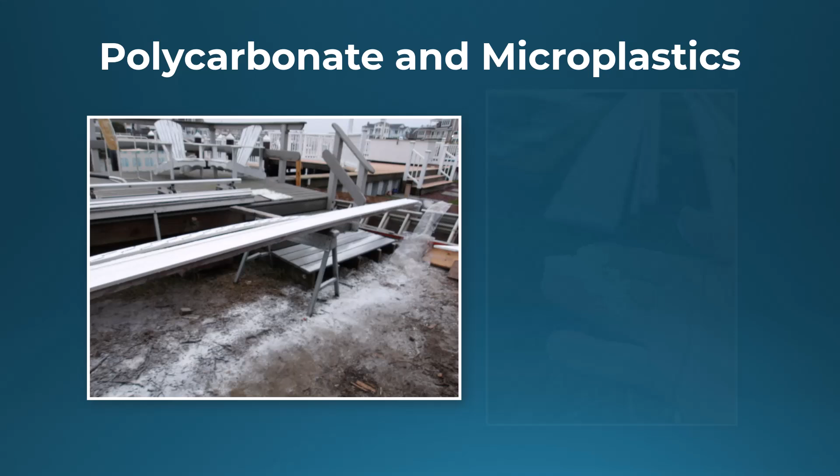So what are typical contaminants produced at the work site? We have polycarbonate materials and microplastics from items such as vinyl siding, vinyl railing, tracks, AZEK, and PVC pipes, just to name a few. Silica dust from cutting and grinding pavers and cement products. And of course, we have fiberglass.

These contaminants make their way into the air, soil, stormwater, watershed, and ultimately into our bodies either from being inhaled, ingested, or rubbed onto our skin. We will start by reviewing the health hazards of the majority of contaminants produced on a typical construction site.

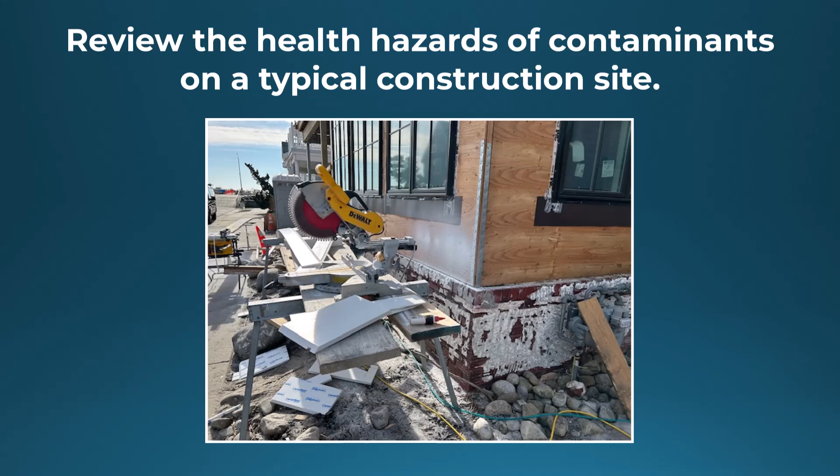The health effects of microplastics. Microplastics have been detected in numerous organ systems, including the cardiovascular, digestive, endocrine, respiratory, and urinary systems. They've been found in body fluids like the blood, placenta, breast milk, and also in organs such as brain, heart, lungs, kidney, and liver. Microplastics can become airborne and ingested by any mammal that breathes, such as humans, cats, dogs, bunnies, and other animals found in our environment.

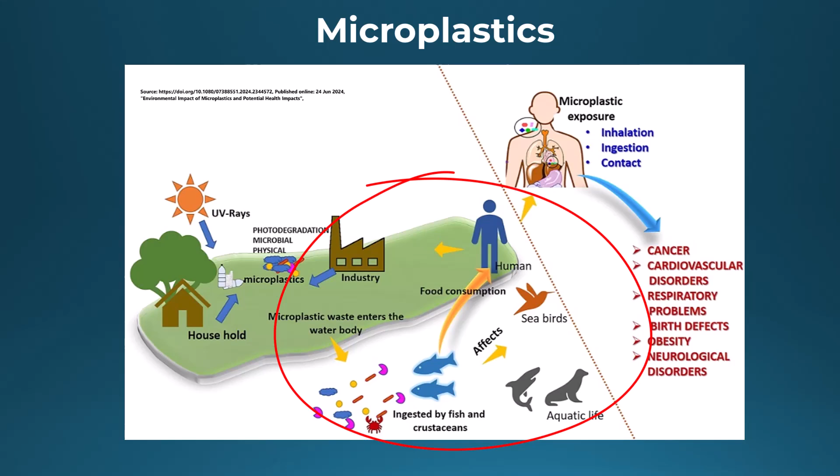Once in our waterways, not only do they pose pollution issues that can be visible, they can travel thousands of miles and contaminate our marine life, which ultimately end up in our food supply chain.

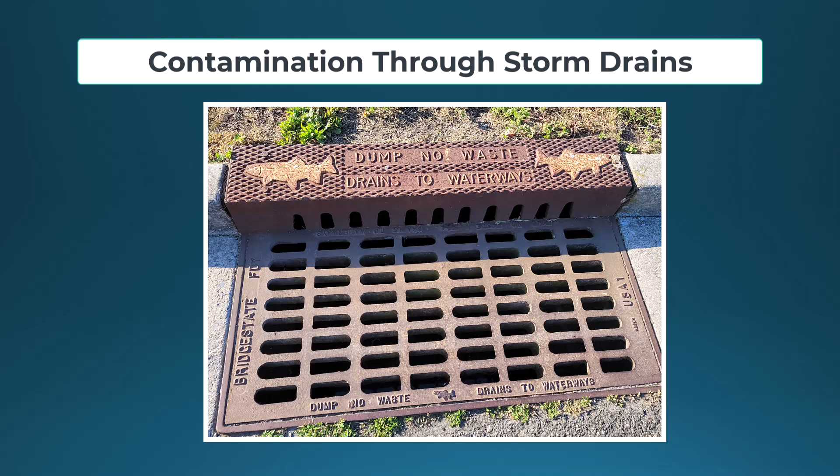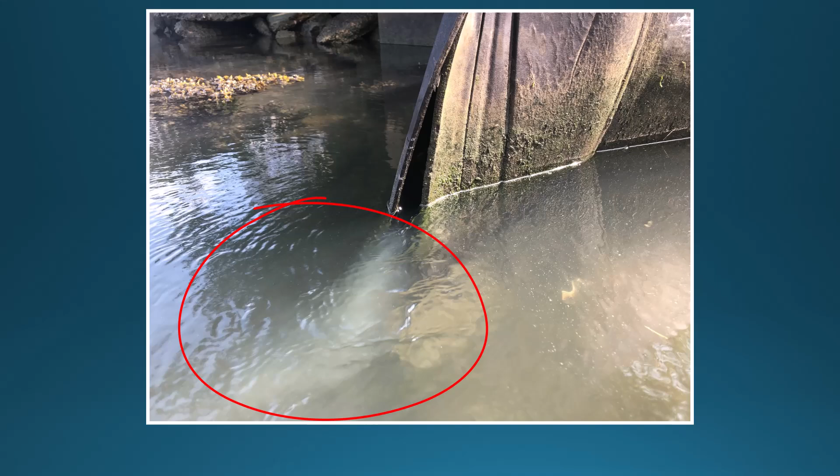So how do they get into our rivers, streams, oceans, bays, and natural water resources? One of the ways is by our storm drains. If a contractor does not clean up their debris, it can go into our street and then ultimately end up down our storm drains and into our water. Once there, it takes hundreds or thousands of years to decompose.

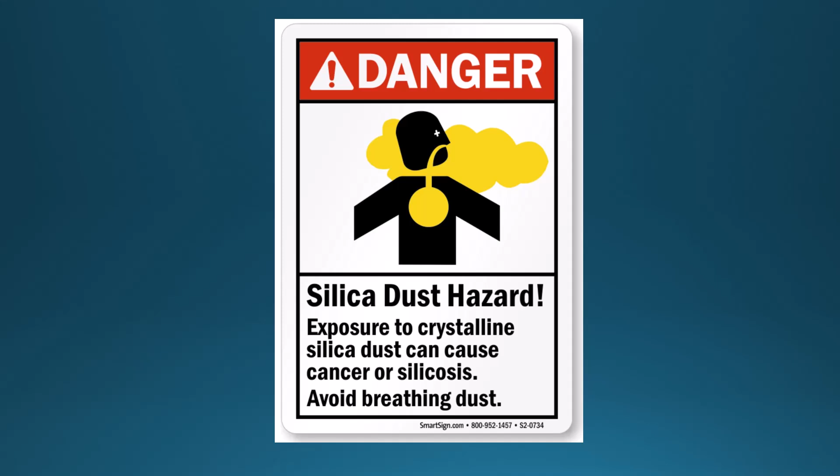The health effects of silica dust. Silica dust comes from many sources, including concrete, mortar, bricks, ceramic, terracotta tiles, manufactured stones such as pavers, roof tiles, grouts, and joint compounds. Inhaling crystalline silica dust is a serious health hazard. Most notably, it causes silicosis, an irreversible and potentially fatal lung disease.

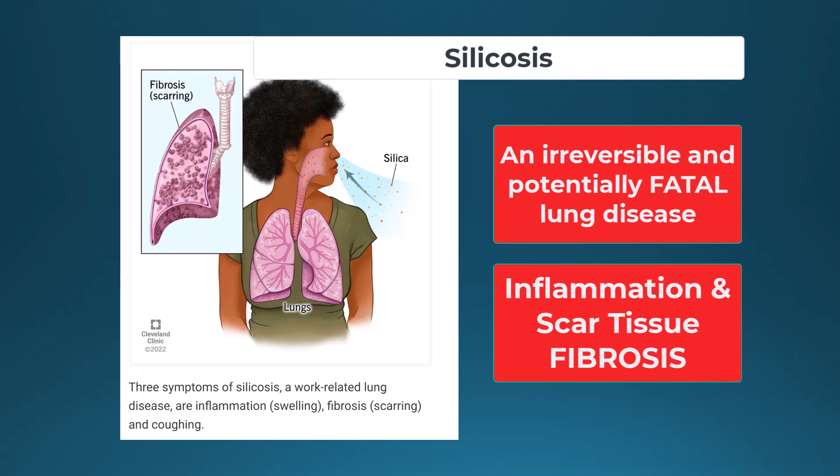Silicosis occurs when tiny silica particles lodge into the lungs, triggering inflammation and scar tissue formation called fibrosis. This scarring impairs lung function, leading to shortness of breath, cough, fatigue, and potentially respiratory failure. The severity and progression of silicosis depends on the concentration, duration, and type of silica exposure.

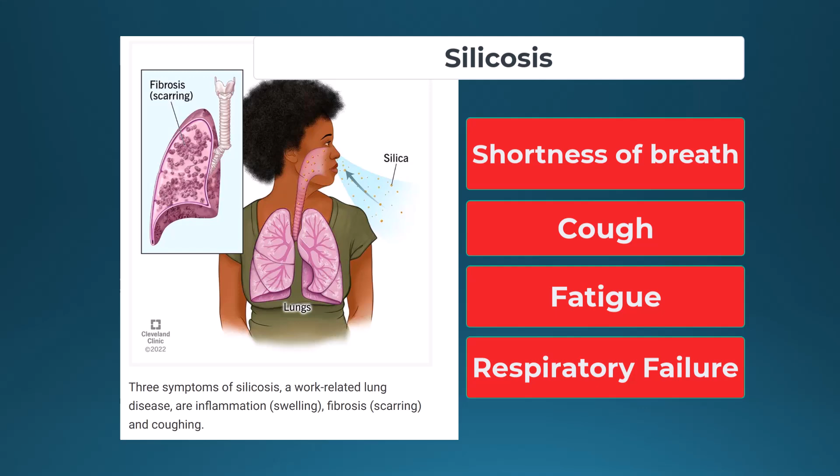Beyond silicosis, crystalline silica is a known carcinogen, significantly increasing the risk of lung cancer. Exposure also raises the likelihood of developing tuberculosis, chronic obstructive pulmonary disease, or COPD, and other respiratory illnesses.

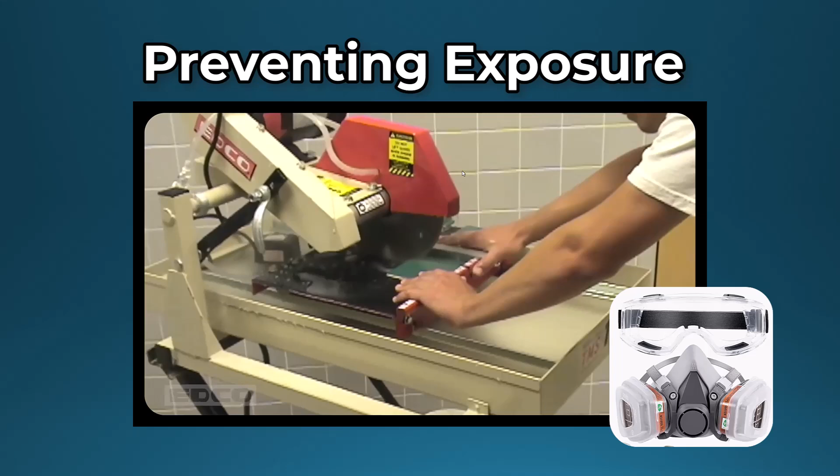Furthermore, silica exposure has been linked to systemic health problems including autoimmune diseases like rheumatoid arthritis and lupus, as well as kidney disease. Preventing exposure through workplace controls like ventilation, wet methods, and respirators, alongside regular medical monitoring, is crucial for protecting workers.

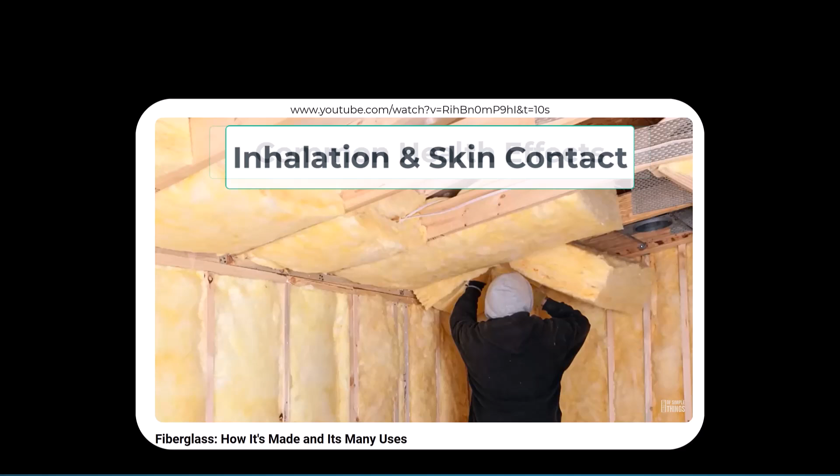The health effects of fiberglass. Fiberglass is a composite material made of fine glass fibers embedded in a resin, and it poses several health risks, primarily through inhalation and skin contact, but most common health effects involve irritation of the skin, eyes, and upper respiratory tract.

When fiberglass particles are disturbed, they can become airborne and easily inhaled. These tiny fibers can irritate the lining of the nose, throat, and lungs, leading to coughing, wheezing, sore throat, and difficulty breathing.

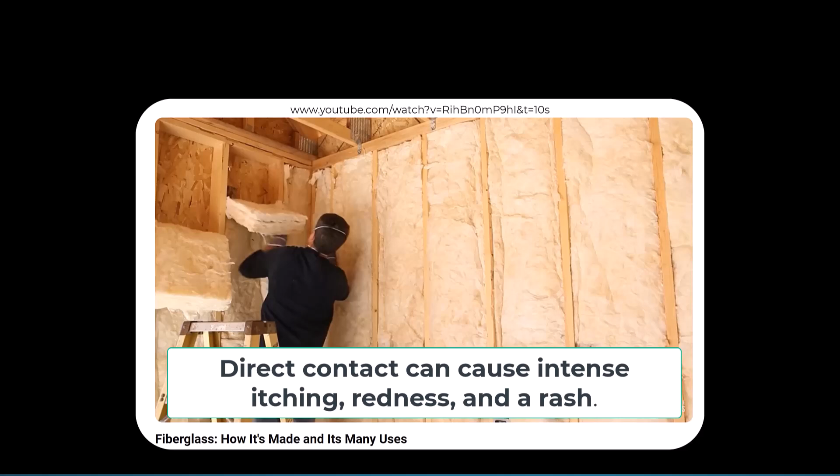Similarly, direct contact with fiberglass can cause intense itching, redness, and a rash due to mechanical irritation from the sharp glass fibers. Prolonged or high-level exposure to fiberglass, particularly in occupational settings without proper protective equipment, raises more serious concern.

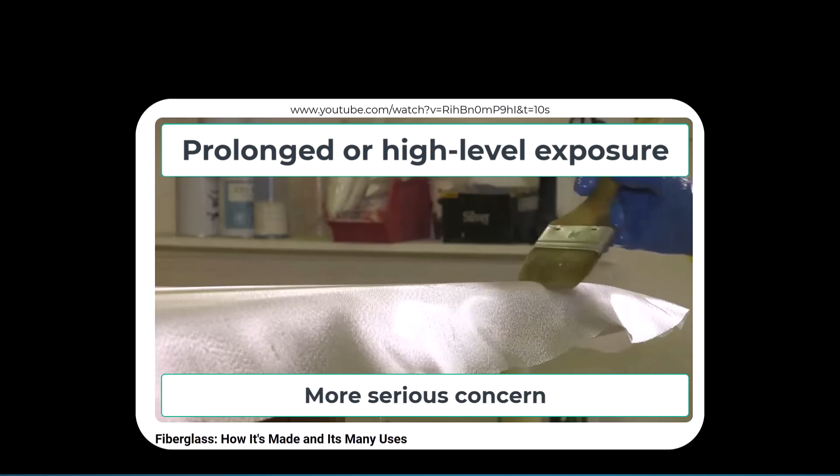While not definitively classified as a human carcinogen like asbestos, some studies suggest a potential link between long-term inhalation of fiberglass and an increased risk of lung cancer and other respiratory diseases such as fibrosis.

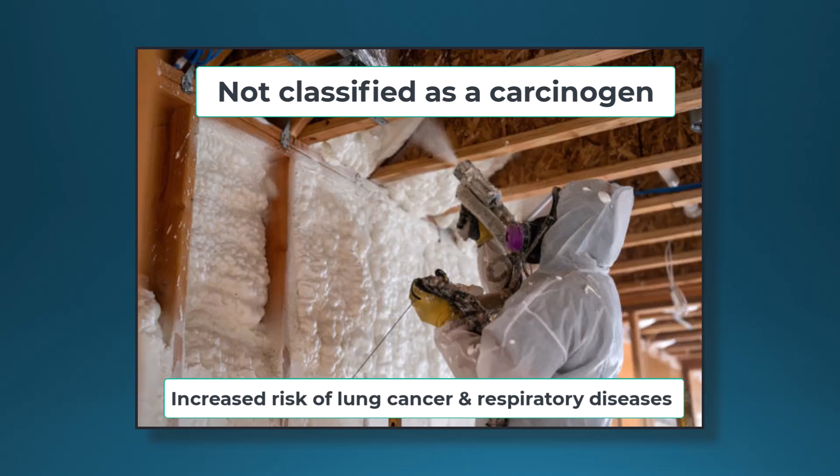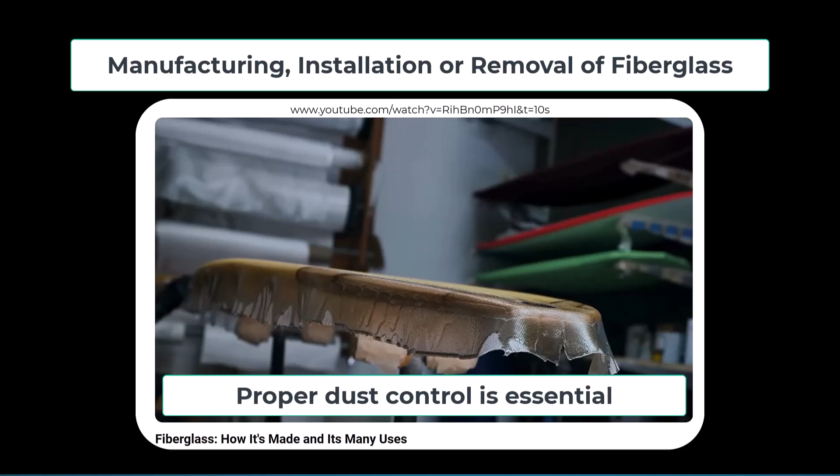The greatest risk with fiberglass is associated with manufacturing, installation, or removal of fiberglass, particularly when dust control measures are inadequate. Wearing appropriate personal protective equipment, including respirators, gloves, eye protection, and protective clothing, is crucial in these situations. Proper ventilation and dust control measures, such as enclosing the space where fiberglass is installed, are also essential to minimize airborne fiberglass particles.

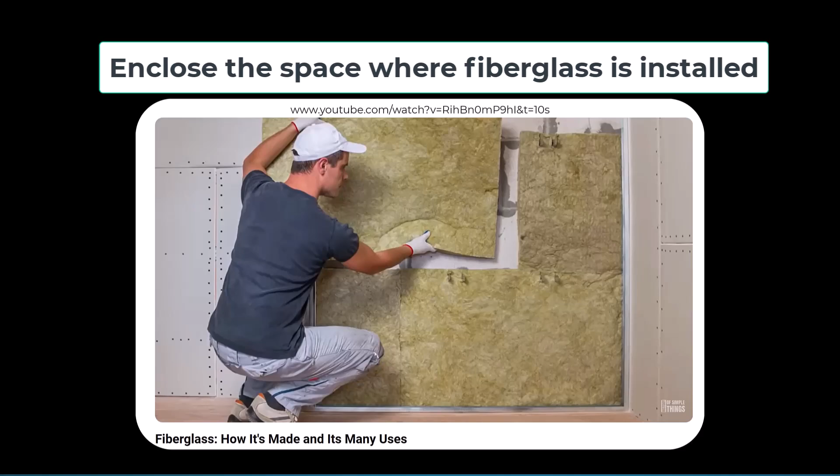What can you do to protect yourself and the environment? To protect yourself from worksite contaminants, the first thing you should do is familiarize yourself with OSHA guidelines and the material safety data sheet on all materials you are working with.

It's always good practice to wear protective clothing like a Tyvek suit so you don't get contaminants on your clothes and take them home with you, and also to wear eye protective gear and a mask or respirator.

As for protecting the neighborhood and environment, there are many relatively inexpensive and easy-to-use containment equipment available on the market. When setting up for the day, the first thing you should do is put a tarp underneath your tool and have a reusable hood or tent over your tool to contain the contaminants from becoming airborne. The tarp also keeps the contaminants from getting into the soil below.

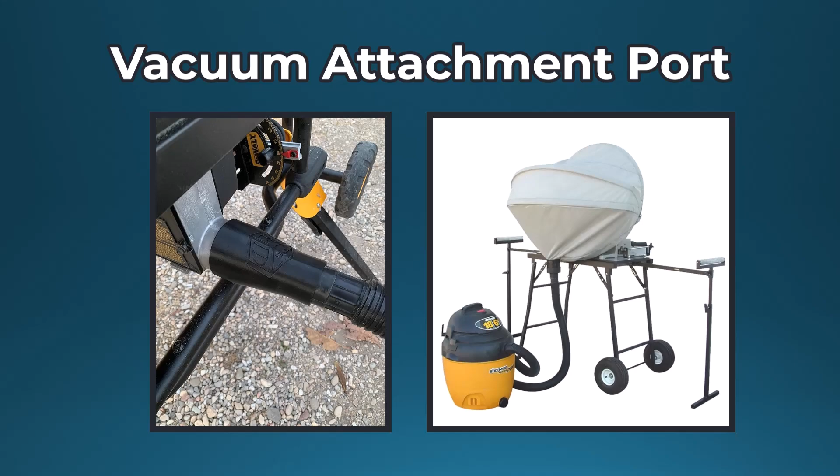Many saws have a vacuum attachment connection that can be utilized directly onto the saw, or the hood that you're using should have a vacuum attachment port. This port can contain the contaminants and suck them into the vacuum.

If you are cutting pavers or other silica-based materials, you should utilize water for the saw and also put a pop-up tent over the tool.

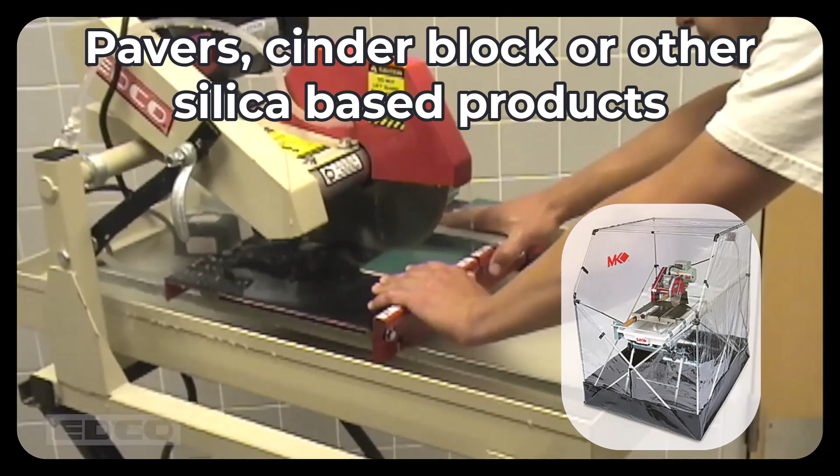When applying fiberglass on the surface such as an outdoor deck, the area should be contained with tarp so that the fiberglass fibers do not spread throughout the neighborhood.

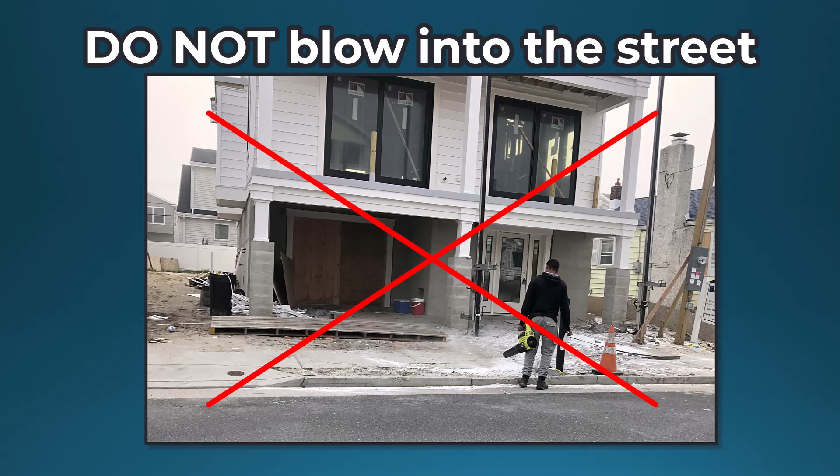At no time should your cleanup of a work site include dumping contaminants into the ground or blowing them into the street.

Where can you find these containment devices? Contact your tool manufacturer and ask if they offer special hoods and/or tents for your tools. If the tool manufacturer does not have recommendations, then go to your local hardware store or search for them online. There are many items available.

Thank you for taking the time to watch this video to educate yourself on construction hazards and how to keep yourself, your coworkers, your family, your neighborhood, and the environment clean and safe.